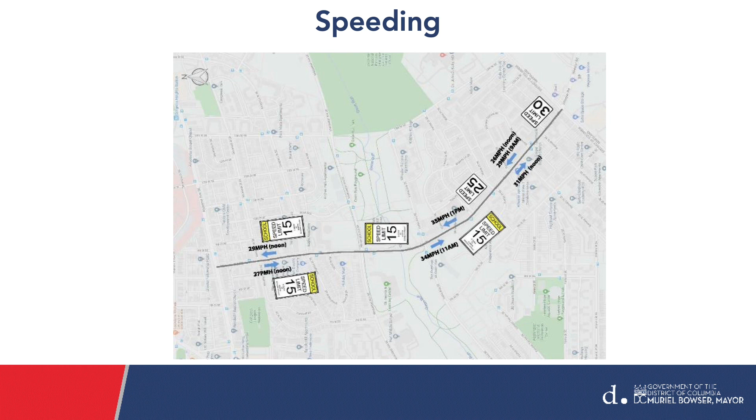A spot speed study in 2019 found that some vehicles exceeded the posted speed limit. This was further supported from ongoing conversations the DDOT team has had with residents that speeding is a problem on Wheeler Road. The next 3 slides are tools or solutions to help reduce speeding. Median islands slow traffic by narrowing the roadway. Studies have found that speeds can be reduced by up to 8 miles per hour. The top photo shows a raised concrete median, and the bottom photo is a painted median.

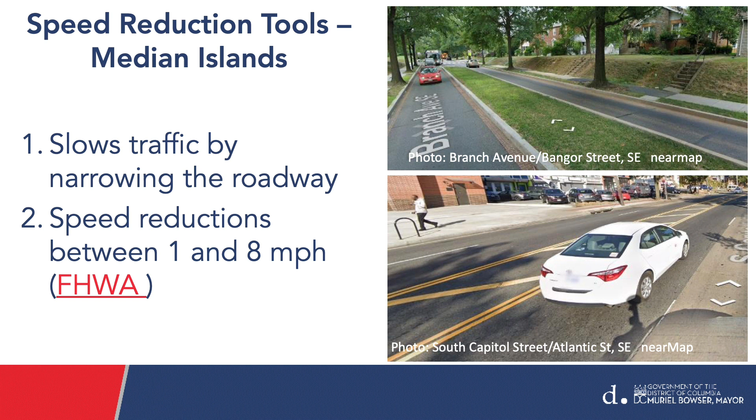Automated speed enforcement cameras are another tool that have been found to be very effective in reducing speeding and crashes, despite mixed reviews from residents. In DC, a study found that cameras slowed down a majority of vehicles, 82%, that were going 10 miles over the speed limit and reduced speeds by 14%. Nationally, cameras have been shown to reduce crashes by 17%.

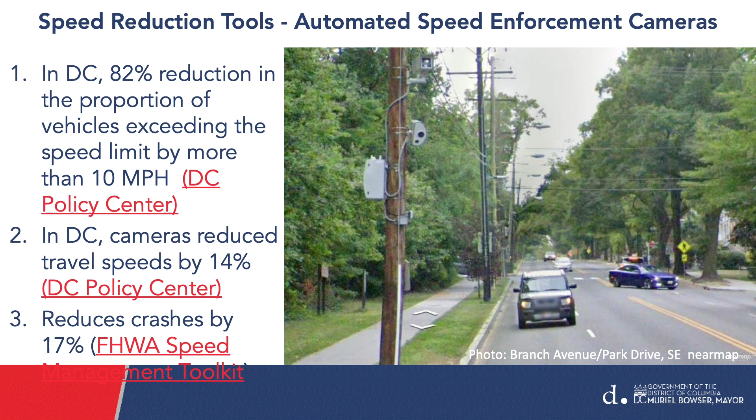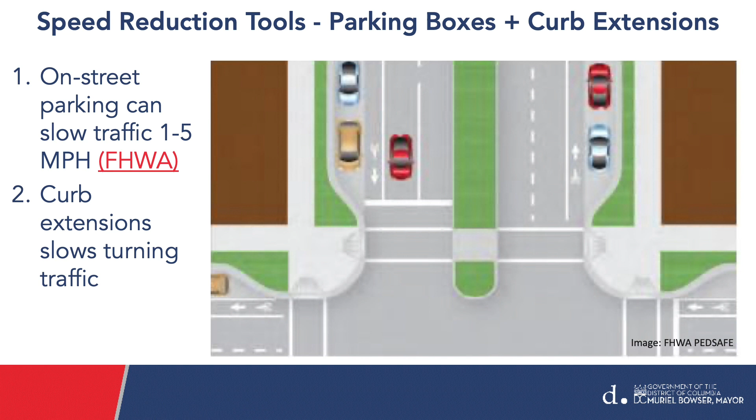Painted on-street parking lines combined with curb extensions force vehicles to drive slower by narrowing the road and to take turns slower by reducing or tightening the turning radius at a corner. Plus, curb extensions have the added benefit of pedestrian safety by shortening the crossing distance and making pedestrians more visible to drivers. Topic 2, vehicle crashes.

Wheeler Road has been identified as a high crash corridor. This map shows the concentration of crashes along Wheeler Road between Alabama Avenue and Southern Avenue. The darker orange-red color indicates where crashes are occurring more frequently. The blue dots represent crashes involving pedestrians, bicyclists, or fatal crashes. There were 16 of them between 2017 and 2019. The Wheeler Road Southern Avenue intersection has the highest concentration of crashes along the corridor. This intersection will be improved by a separate project for Southern Avenue that is already underway.

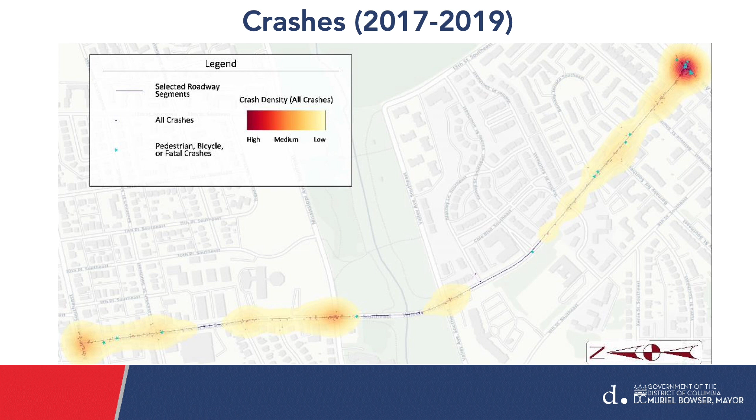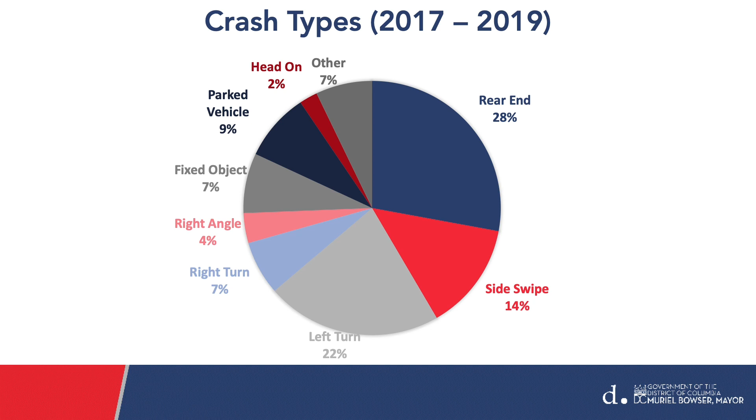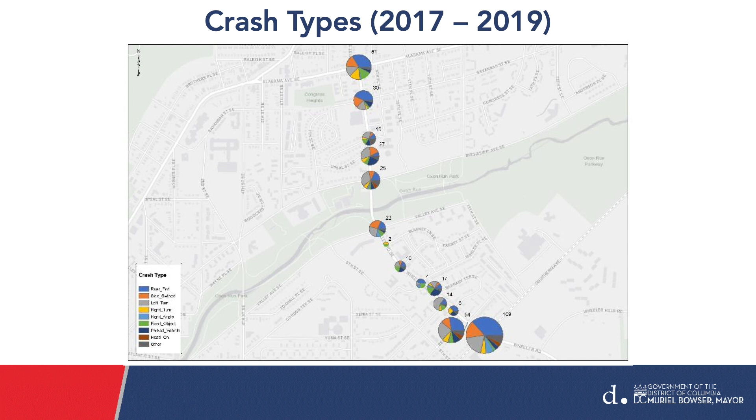The most common type of vehicle crash along Wheeler Road is a rear-end crash, which accounts for almost 1/3 of the crashes. The second most common crash type are left-turn crashes, almost 1/4, followed by side swipe crashes. Shown in the pie graphs are the number of each type of crash. The Southern Avenue intersection had the most crashes, followed by Bellevue Street, then Alabama Avenue, Savannah Street, and Mississippi Avenue intersections. The next 2 slides are tools to help reduce crashes.

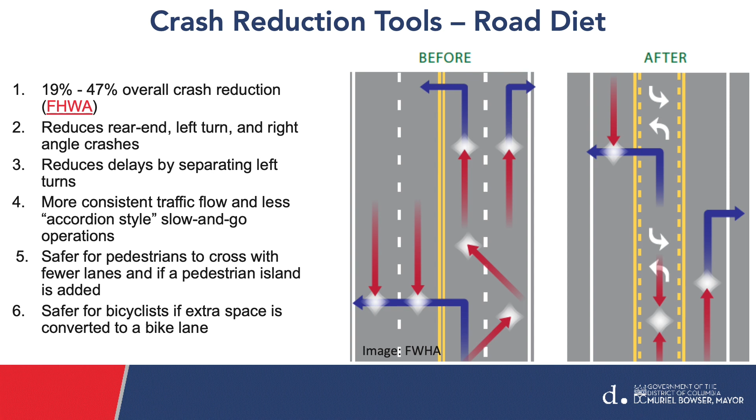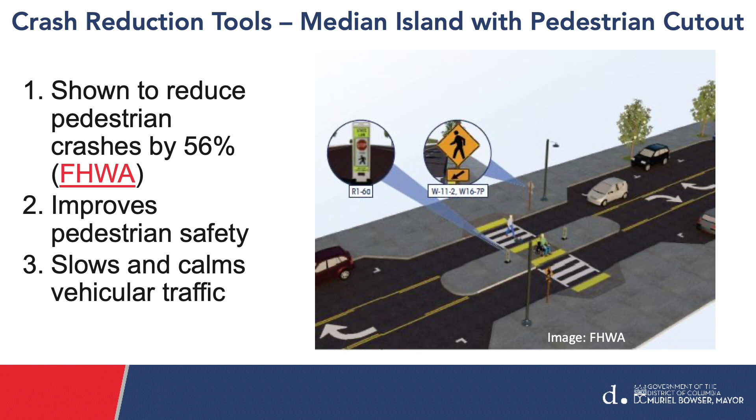Median islands with pedestrian areas can slow vehicles and help pedestrians cross the street by narrowing the roadway and providing an area for pedestrians to stop, look, and then cross. Medians have been shown to reduce pedestrian crashes by 56%.

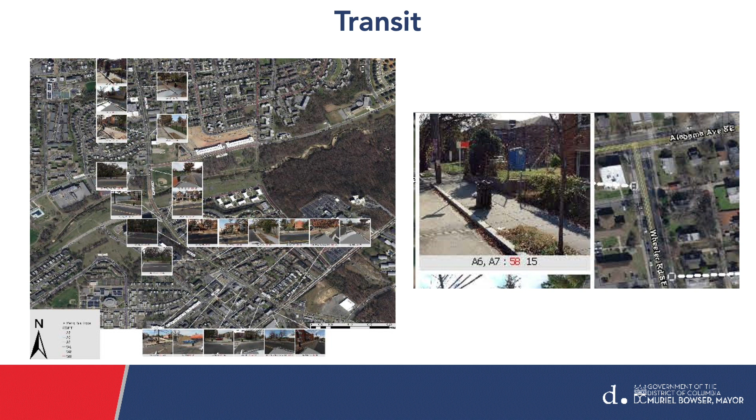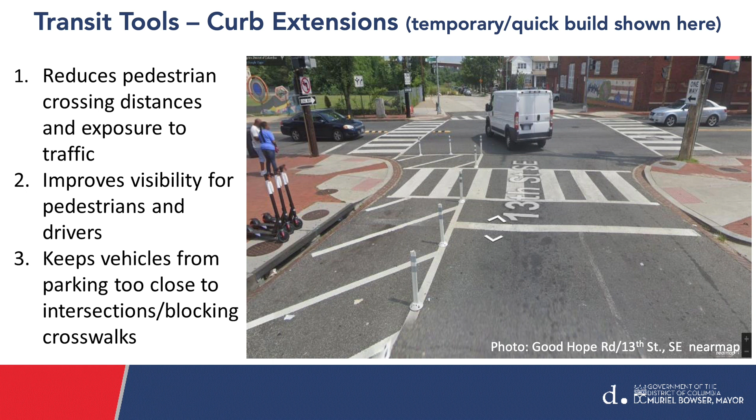The next 6 slides are tools and solutions to help people get to and from the bus stops safely. Curb extensions reduce the crossing distance for pedestrians while forcing vehicles to slow down while turning. Shown in the photo is a pop-up or temporary curb extension at Good Hope Road and 13th Street. Temporary installations are a good way to test out any tool to see how it works before installing something permanent. Plus, DDOT can install these quickly to solve a problem.

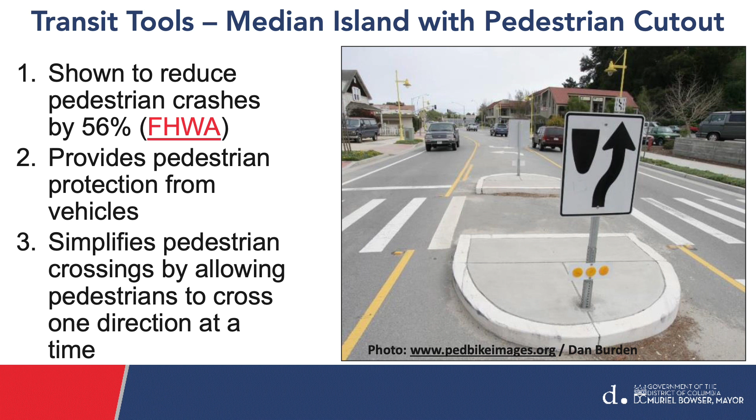Median islands with a pedestrian cutout can slow vehicle travel speeds and help pedestrians cross the street by narrowing the roadway and providing an area for pedestrians to stop, look, and then cross. Medians have been shown to reduce pedestrian crashes by 56%.

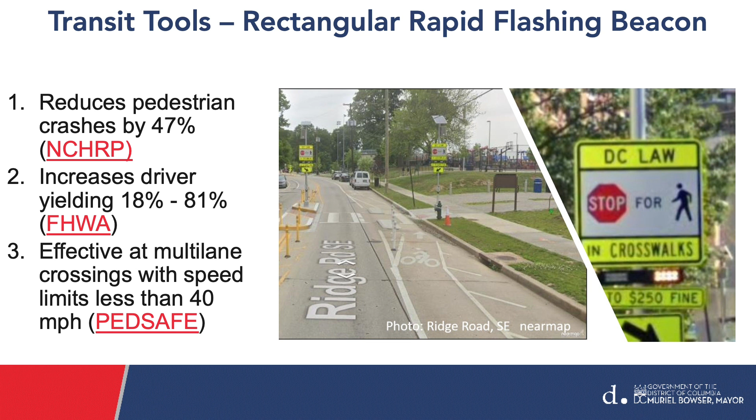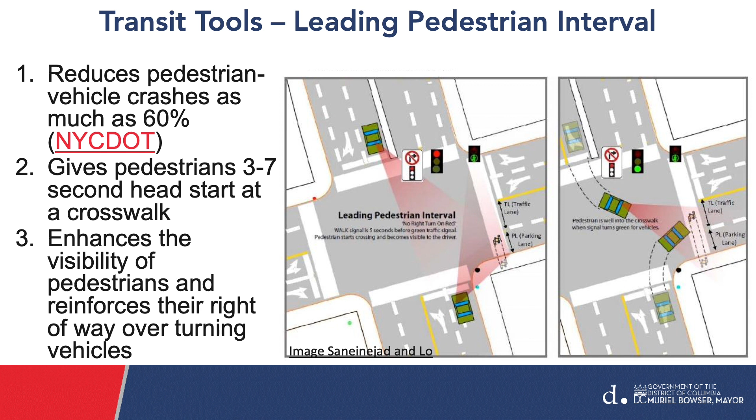A leading pedestrian interval is a safety tool that is programmed into crosswalk signals and gives pedestrians a head start in crossing the street before vehicles get a green light. Typically, leading pedestrian intervals allow pedestrians to cross 3 to 7 seconds ahead of vehicles, which allows them to be further into the crosswalk and more visible to drivers. These have been found to be very effective for reducing crashes by as much as 60%.

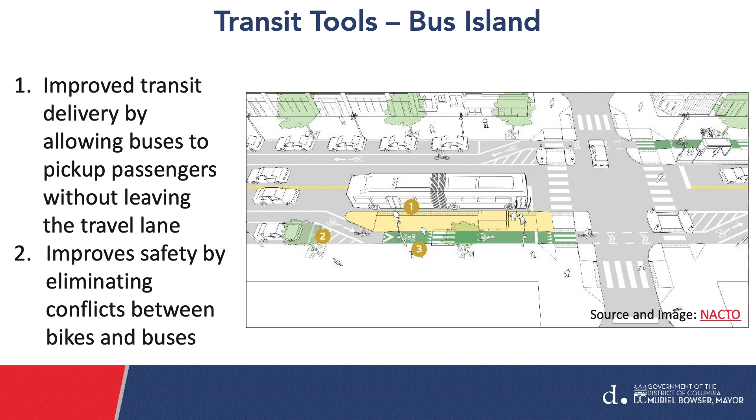In 2019, DDOT conducted a parking audit to determine where parking was used and needed and where it is not being used. The study found that parking was concentrated to 4 key areas: near Southern Avenue, Alabama Avenue, Eagle Academy, and at KIPP DC Somerset.

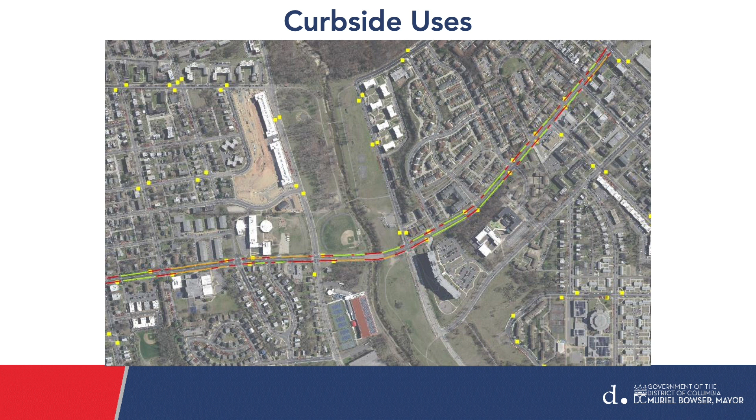The next 2 slides are ideas for curbside uses. Where parking is needed, improve it by painting lines so that vehicles know where and where not to park. Defined parking is especially important near schools so that parked vehicles do not block the visibility of students crossing the street, and so that there's an orderly system in place to safely drop off and pick up students.

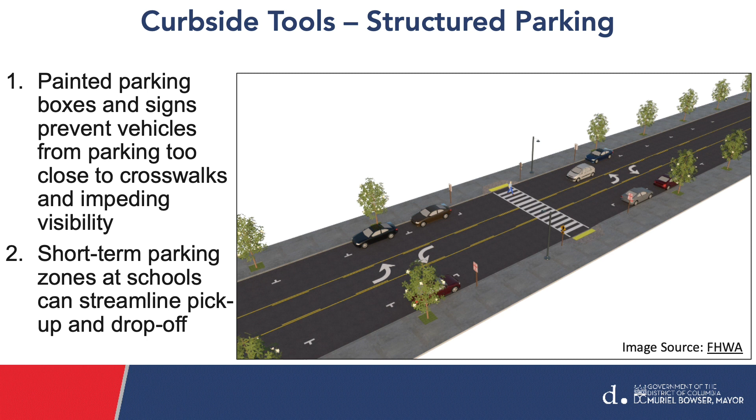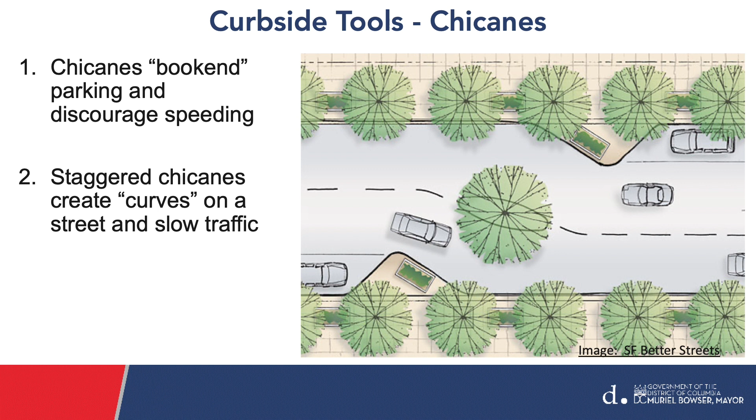Chicanes are similar to curb extensions at corners, but are installed instead along long stretches of straightaway to force a curve in the road and slow down vehicles. These can be paired with parking, as shown in the photo.